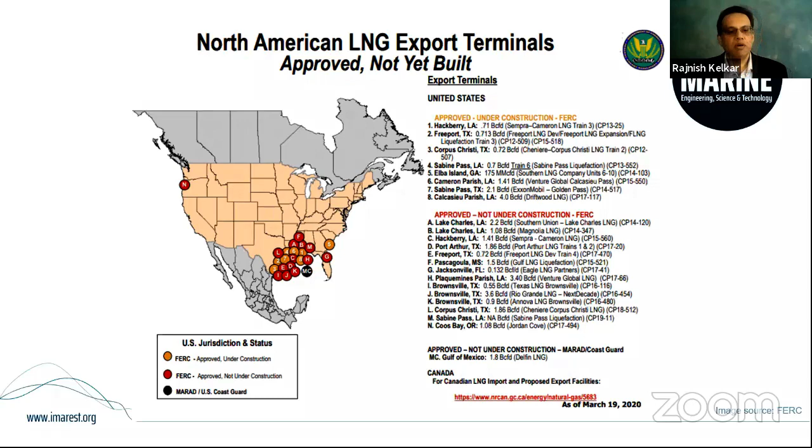So basically what this means is that site and concept selection is one of the most important factors. The select phase, right? The largest opportunity is available to reduce risk by choosing the best site and the best design possible, not only from the risk but also from the cost perspective. And choosing a site from the shipping and maritime perspective, although there are many different criteria, there are a couple of very logical things I can say, like proximity to town. It shouldn't be too close to a busy center or a town. It doesn't mean you'll always find an ideal site, but that's one of the factors.

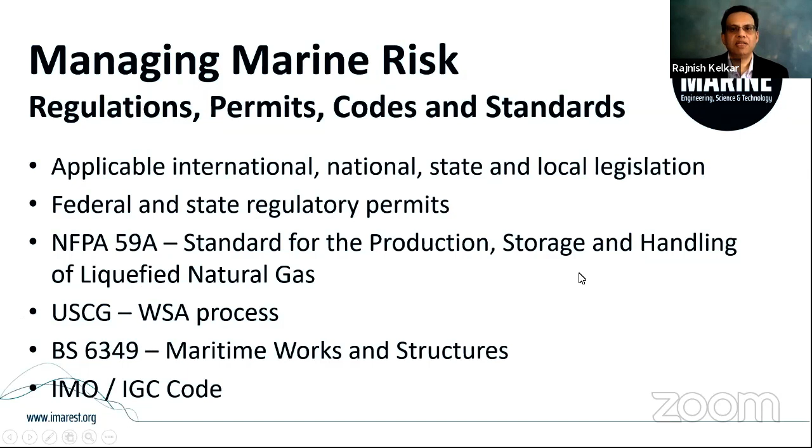And also in operations, there's the IMO and the IGC code. IMO is the International Maritime Organization, IGC is the International Gas Carrier Code. We need to meet those for vessels which are in operation. So going to the next slide.

So let's look a little bit deeper into the federal permitting process. And I've not touched the state process here because that's going to vary state by state. And also we don't have the time. But this process takes care of a lot of things that are federally regulated, so it makes sense. It's very important. So FERC and the US Coast Guard are the two main bodies in here. This is specific to the US, but you'll have similar regimes in other parts of the world as well. So let's talk a little bit about the FERC regulations.

FERC stands for Federal Energy Regulatory Commission in the US, and FERC's approval is needed to site, construct, operate, and place a facility or a terminal in the US. And it's required under Section 3 of the Natural Gas Act. So it's an independent body. They have the authority over this. Similarly, in Canada, at least on the West Coast, there's the BC Oil and Gas Commission. So they are a similar body to FERC.

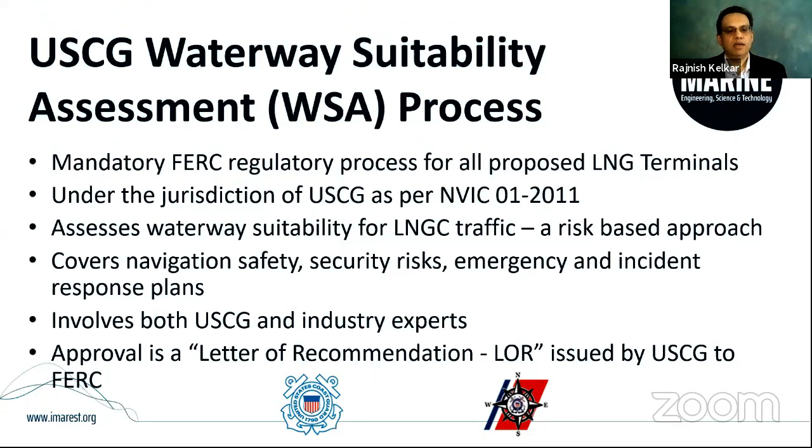So one of the main parts of the WSA is the WSA risk assessment. Now this is classified as sensitive security information, or you can classify it as protected critical infrastructure information, which prevents it from being open to public sharing and dissemination. It's shared on a need-to-know basis under a non-disclosure agreement under the Department of Homeland Security. So it's controlled information. It's all geared towards risk reduction in bringing LNG vessels in and out of the US ports, right? And includes navigational, operational, security risks in transit, including some possible intentional acts to damage the LNG carrier or facility. So it's a very important piece of work.

Output from this is that you need to ensure that you have response plans, facility security plans, and transit management plans, which need to be developed along the permitting process, but need to be in place before start of operations. In fact, even before you start construction. For example, during construction, you might need a special security plan for module transportation and things like that. So very important piece of work.

So a subset of the WSA risk assessment, I just want to talk about the security risk assessment part of it, because it connects to a few other things that we'll be talking about further down in the next few slides. This too is sensitive security information, or PCII, protected critical infrastructure information, and it evaluates security risks, right?

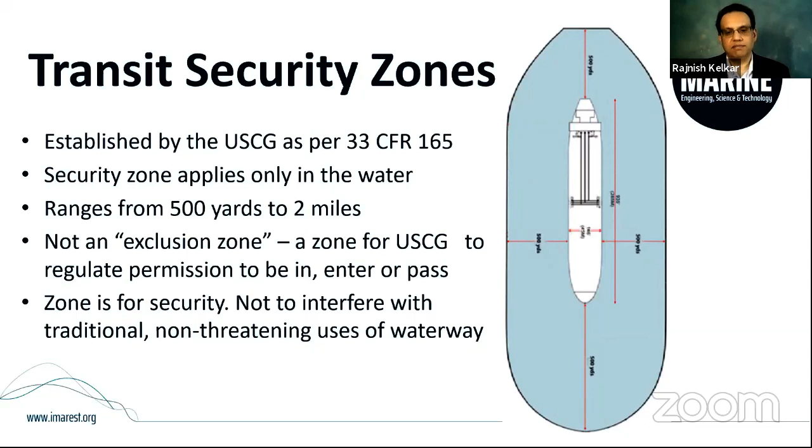So now let's look at the zones of concern. Basically, we looked at the security zones, and we said that there's a chance of a vessel possibly being attacked. There's also a chance of possible grounding. You can have vessel collisions that can happen too. Those are certain risks. They could be intentional or accidental discharge, right, of LNG. And once there's a large quantity of LNG spilled on the water, of course, there's going to be a huge gas cloud, and then there could be potentially a large pool fire.

So because of that risk, US Congress actually asked Sandia National Laboratories, which is located in Albuquerque, New Mexico, to study the impacts of these large pool fires. They did two reports. The first one was in 2004 for smaller vessels up to 150,000 cubic meters, and the 2008 report was for larger vessels up to about 265,000 cubic meters, which is the Q-Max vessels, right?

So their study actually defines 3 concentric zones of concern based on the thermal hazard from a large pool fire. And they have looked at accidental and intentional. They've looked at near shore and offshore as well. And they've given some broad guidelines. And they've said that if you want to analyze this a little bit more, then their guidance is to do computational fluid dynamics, CFD modeling, so that you can improve the analysis for very site-specific hazards and put some additional measures and mitigations in place.

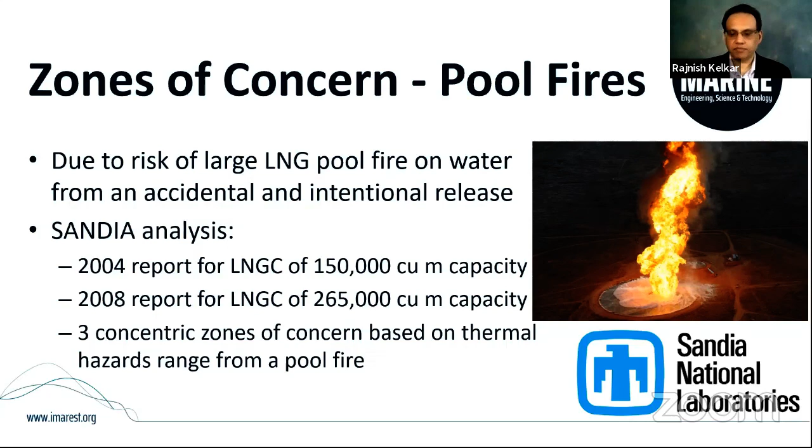Zone 2 and Zone 3 are decreasing levels of impact. In fact, in the lowest zone, I believe the thermal impacts are like 5 kilowatts per meter square, which if you shelter in place, then that is adequate. If you have some barrier, if you're not exposed directly, then you should be okay. But Zone 1 is a zone of concern, and definitely needs some mitigation measures.

And some of those strategies you can employ there are what we talked about as part of the safety and security zone assessment. Vessel security zones need to be in place. You need to manage the traffic in that area to avoid collisions. So having a VTS, vessel traffic service, is a good idea. Ensure that you have emergency response in place, capability for firefighting with tugs, and on the tugs, have ability for salvage and response.

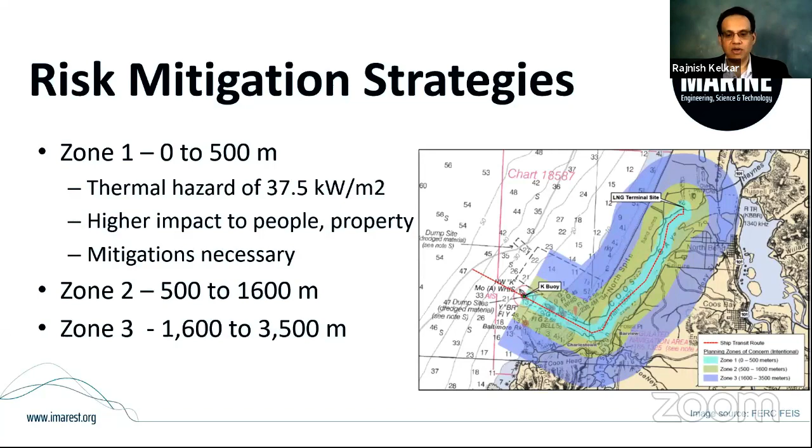We should have community warning systems and procedures, and also have educational programs for increasing community awareness of what happens in case there's a large release. And of course, gas cloud dispersion modeling studies and things like that. You can use CFD for that to understand specific hazards.

So now we already looked at the marine risks with regulations, codes, and standards. And we also looked more closely at the federal permitting process and the marine risks addressed by the Coast Guard, WSA process, Sandia zones, and things like that. Now let's look at what the industry guidance and best practice has for us. So I've just picked 3 main ones. There's SIGTTO, OCIMF, and PIANC. There are others, but I've not listed all of them in the interest of time.

SIGTTO is the Society of International Gas Tanker and Terminal Operators. Their recommendations are not mandatory, but are extremely important and relevant for risk reduction. OCIMF is Oil Companies International Marine Forum. They also publish the ISGOTT, which is the International Safety Guide for Oil Tankers and Terminals. They also publish mooring equipment guidelines. The fourth edition is the latest one, I believe. That's called MEG, mooring equipment guidelines. And PIANC stands for Permanent International Association of Navigation Congresses, but I think it's been renamed now to the International Navigation Association. So these three bodies are extremely relevant for marine risk assessment and reduction.

So let's look at SIGTTO, because SIGTTO is the most relevant and has published a lot of material on this for operations as well as for site selection and design. This paper in particular, the SIGTTO information paper number 14, is extremely critical. The central theme of this, just as it says, site selection and design, is basically selecting the appropriate site, which is what we talked about in our first slide, if you remember, the risk reduction in the early phases.

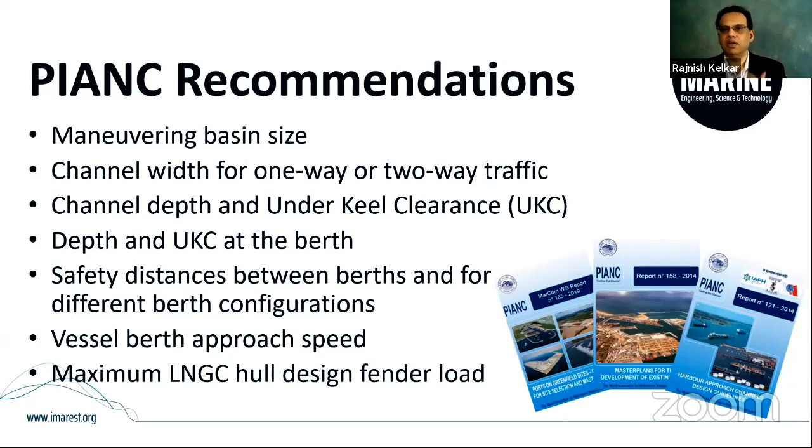Right? And then the berthing approach speed, I think they've specified 122 millimeters per second, and also the maximum hull design loading. So there are some values which they've given in the studies. Safety distances between berths for different berthing configurations and things like that. So a lot of relevant information.

So in most of the projects I've been involved with, we've done full mission ship simulators. This is actually a must. You may need to do many simulations. This is similar to simulators in the aviation industry.

The simulations that we did were at CMA, California Maritime Academy in Vallejo, California. There is also MITAGS, which is Maritime Institute of Technical and Graduate Studies in Maryland. They have the PMI, Pacific Maritime Institute. There's MSI, Maritime Simulation Institute at Newport. In Europe, there's Force Technology in Denmark. So there's quite a few you can choose from.

All the hindcast data from the current and environmental conditions is input into the model. Bathymetry information is put in. You can simulate, for example, the as-is condition of the channel, and also if you're going to dredge and expand the channel, then you can do both to see where you need to do what exactly to make the transit of the vessels in and out very efficient and safe.

You can use the one main simulator, and you can use 2 or 3 different tugs and work as a team, tugs and ships together in real time with real-time communications. And you can also test out new technology, things like differential GPS, portable pilot units, and identify where you need additional aids to navigation, buoys and other markers that may be necessary, plus train your ship's crews before they actually bring the vessel in. So a lot of good risk mitigation measures there.

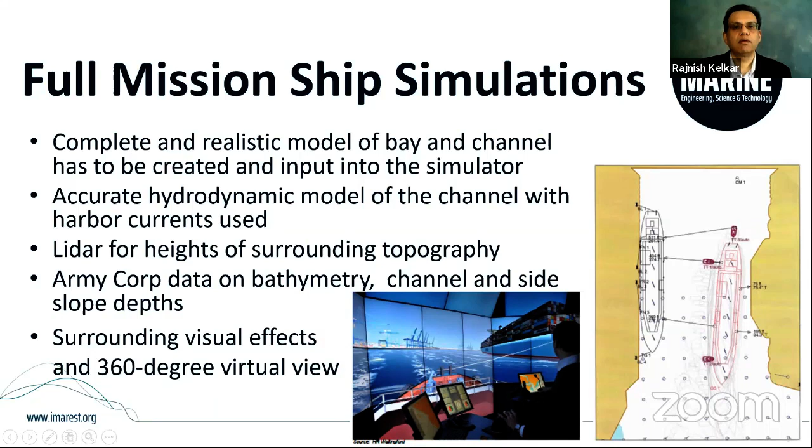So some of the simulation parameters that we used, you have to decide how many pilots will you have? So we had used 2. It depends on the length of the pilotage and things like that. Generally, for LNG vessels, you should have 2 pilots minimum, number of tractor tugs, and whether these tugs would be tethered in active escort or just passive mode, or would it be just escorting, and where would they actually tether, and so on.

You can involve your ship owner and operators also in the simulation, bring them in, let them see it. You can bring in regulators as well, so they have the comfort. They actually want to see how you're doing the simulations and what the risk is; the US Coast Guard wants to see that. You can bring in customers and other stakeholders as observers as well.

Do a lot of tests in terms of inbound, outbound, loaded and ballast passages, day and night. Also, you can simulate failures, things like engine failure, steering, mooring breakage, disabled tugs, and so on. And you can use, as I said, technology for DGPS and portable pilot units as well.

So we were on this slide here. I think I clicked to the wrong place. Okay.

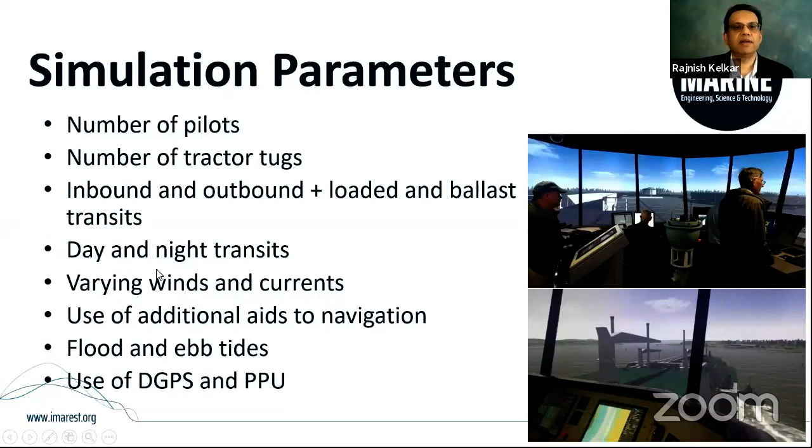So simulation will reveal a few other challenges and channel risks. For example, you might find that it's not wide enough or deep enough, or may have some sharp turns. So the selected channel may not be ideal from all perspectives, right? It may not be deep enough, wide enough, or it may be tidally restricted.

There's also an increasing trend of vessels just getting larger and larger. Ports are not becoming larger. There's a lot of cost in dredging. So the impact is that you may find that you are unable to bring in ships, or the margins of safety are reducing, that there are delays and things like that.

So there are a lot of advantages. You can overcome all of these issues by dredging and widening and improve safety. But there are a lot of operational challenges to dredging as well. Something I just wanted to touch upon on this slide; I just have one slide on dredging. So the operational challenges could be like mobilizing and demobilizing. There's a time and cost to that, right?

There's also an issue with in-water work windows. You cannot dredge throughout the year in some areas. Maybe some places it's possible, but for example, on the West Coast, it's October to February. There's an impact to the benthic species and fish habitats. In some areas, for example on the West Coast, there's the eelgrass, which is a salmon habitat sensitive area. So you need to think about that and get appropriate permits. In the US, it's the Army Corps of Engineers that you need to work with pretty closely.

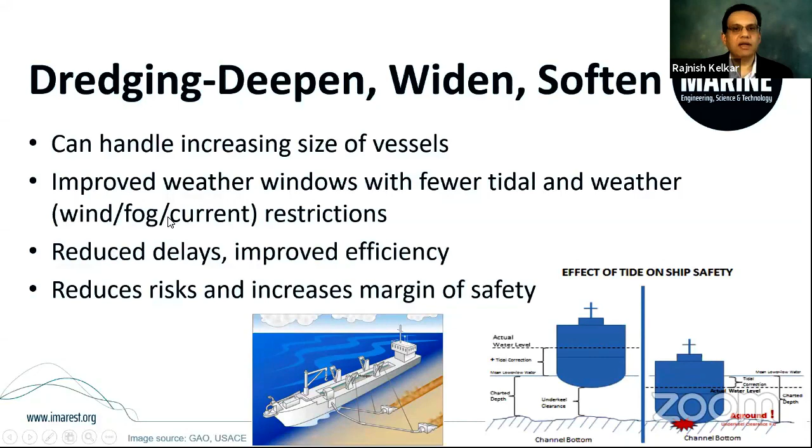Right? So now we just looked at marine risks with industry guidance and best practices. Now let's look at managing marine risks with company standards and policies. When I say company standards and philosophies, there's quite a few of them. I've just listed here the marine philosophy. There are many others, and I will not go into those. They capture all the requirements which are over and above codes and standards, and they are input into the pre-FEED, FEED, and detailed design.

They capture the essence of your design concept and feed into the basis of design, detailed engineering, and design of the facility. And the marine philosophy is used through all the phases. It starts from identification of the opportunity, all the way up to the construction and operation of the facility. So it's a very important document for project development.

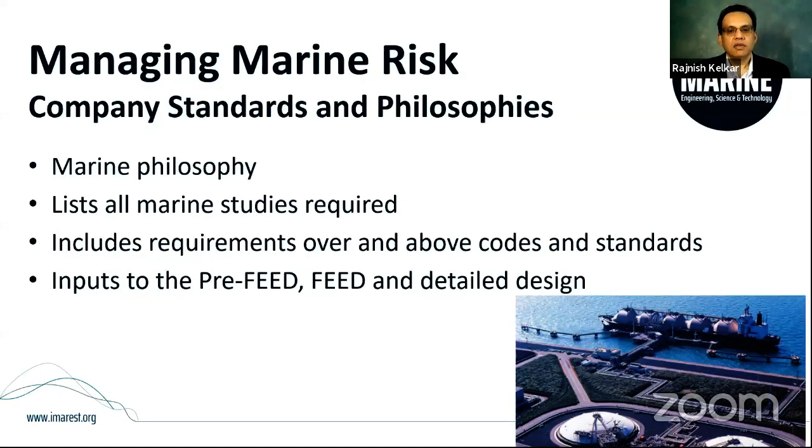So let's look at some of the studies that are required as part of the marine philosophy. Again, this is not an all-inclusive list; I've just included a few. There's the navigation feasibility study, which checks to ensure that the vessel can come in and out safely. Storage and logistics study, which looks at the storage availability in your tanks, minimum capacity of the tanks, whether you have tank tops, whether you will have a liquefaction output that can be sustained, and the number of ships that are coming in and leaving.

It's actually a Monte Carlo simulation, which looks at all the variations and limiting factors and delays due to metocean conditions, weather conditions, tank sizes, operational limits, and other outages. You can put in all the old met information and run the simulation. It tells you what size the fleet should be, and there's all kinds of other studies that need to be done. In the interest of time, I'll skip speaking about those, and we'll go to the next slide.

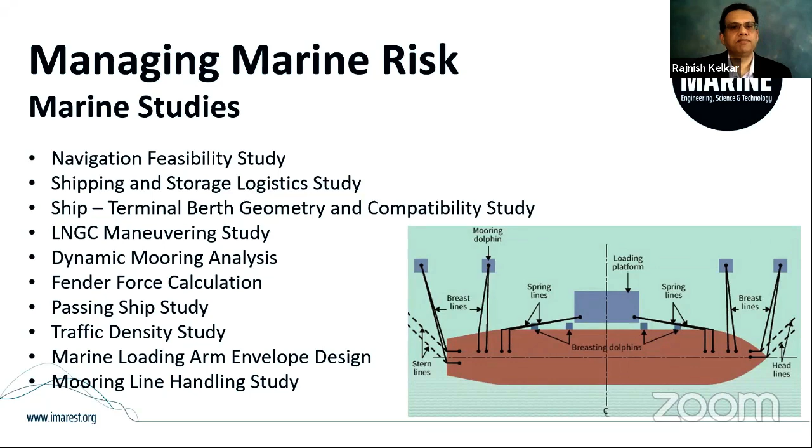So let's talk a little bit about other opportunities that are there in the project development phases for the project to add to reduce risk. And there are two optional features, actually. Not all terminals may have them. So that's the PERC and the quick connect and disconnect thing.

Marine loading arms, basically, can be equipped with this PERC release system, and the connection to the vessel could be a QC-DC coupling. So the marine loading arms are required for loading and discharge of cargo, critical ship-shore interface equipment. It's important because that's the place where the containment is actually broken twice in every ship's visit, first during connection and then during the disconnection.

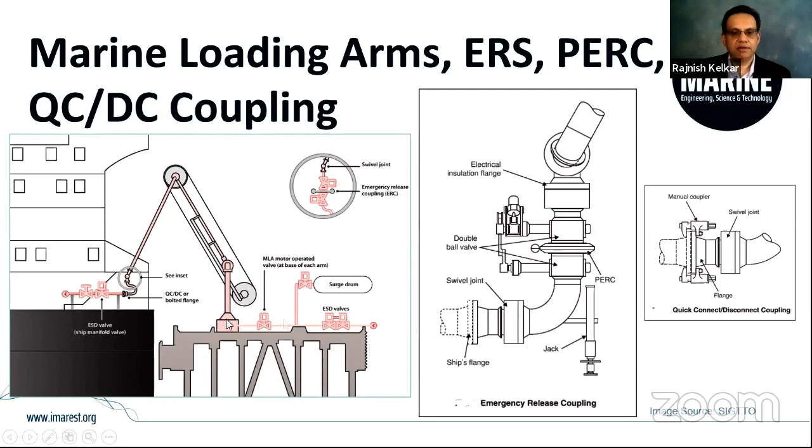In most instances, it could be just a basic flange connection. It can be upgraded to a quick connect disconnect, which makes it easy to connect. Because when a vessel is in motion and there's a lot of heave and surge, you don't want to be there trying to take bolts out or put them in. It's just dangerous. The coupling has a hydraulic operation, and that hydraulic operation is independent, so you can release it pretty easily. It's a risk reduction measure for safety of personnel, but I think it's extremely important and should be part of the design.

So we talked about the ESD. Now the ESD is actually activated simultaneously ashore as well as on the ship through a ship-shore communication link. It's called the SSL. So it prevents any delays, communication lapses, things like that, which can be issues resulting in an incident, and that must be avoided.

So it basically interlinks ship to shore. It's a fiber optic cable. Pneumatic is used as a backup. If it's fiber optic, then you can transmit not just ESD signals, but also voice, data and other.

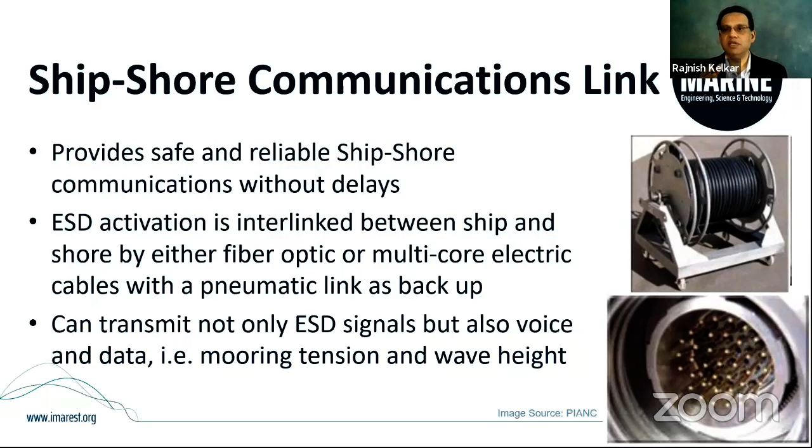Now, mooring and berthing is another very critical operation, and it definitely must not be underestimated. There have been lots of incidents due to errors, which can result in berth, fender or hull damage.

So that's basically a distance speed approach indicator. It uses laser to tell the master and the pilot real-time information on where the position of the vessel is relative to the berth and the approach speed. It can have alarms and things like that. Usually displayed on the berth, but the pilot can have a portable unit as well, if that's possible.

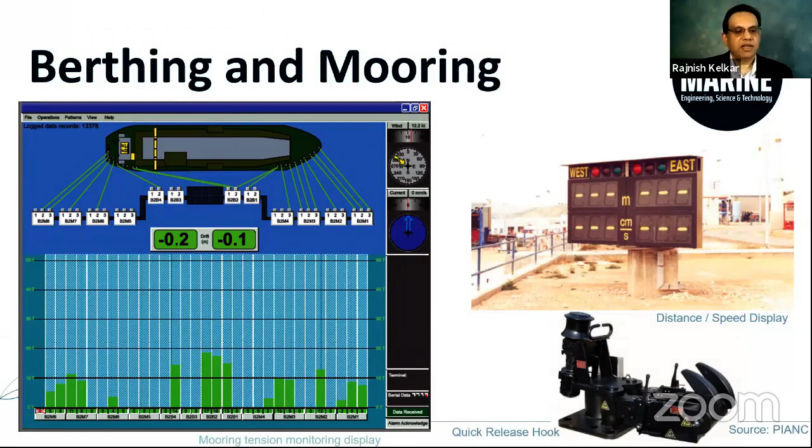So the other things you can do in design are basically install some kind of a real-time system like the NOAA PORTS system. NOAA is the National Oceanic and Atmospheric Administration in the US. PORTS is Physical Oceanographic Real-Time System. So this system measures, collects, disseminates, and predicts accurate real-time data, and it's for the US only.

In Canada, they probably have other systems for doing that. In other parts of the world, there might be as well. If not, then it's a good thing to implement, to improve safety and efficiency of maritime transport and commerce. In the US now, I think about 60 out of 175 large ports have this. So there's still scope for expanding that even in the US. It's usually a public-private partnership with NOAA to design, install, and maintain.

You can have sensors like the acoustic Doppler current sensor, tide measuring sensor, met data collection, wave monitoring. Some of these may have to be installed on the Scripps oceanographic buoys and not Coast Guard buoys, but some of them could be installed on Coast Guard buoys.

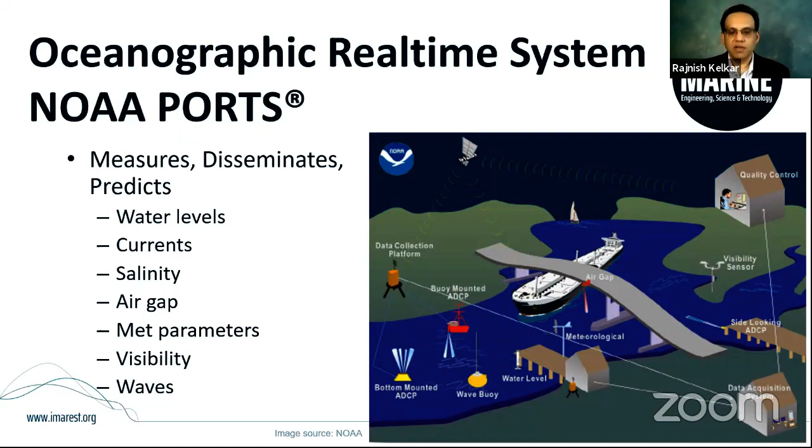So if you can increase cargo carrying capacity draft by even 1 inch or a centimeter, that could mean a lot of extra cargo that can be lifted. Also useful for local emergency response and oil spill response monitoring people. So lots of advantages in the NOAA system.

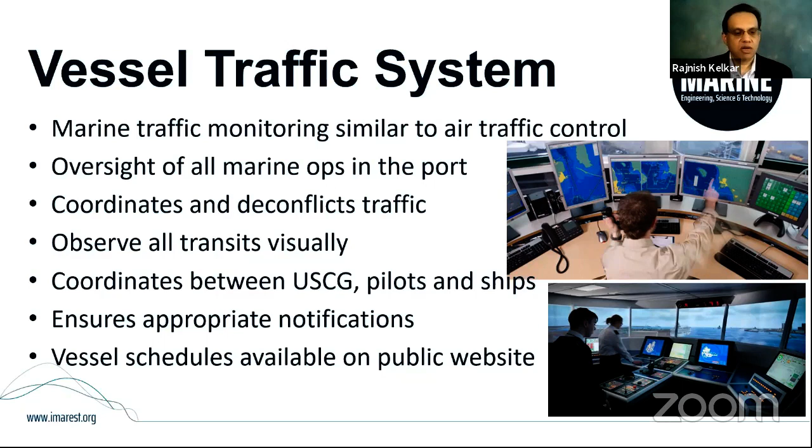Vessel traffic information system is basically similar to air traffic control. One individual has oversight of all the activities in the bay and can track that, and can deconflict the issue before you realize on the ship that you may be in conflict with another vessel and a collision situation may be occurring. So there's a benefit to this, not just to the project, but to other vessels in the area and also to the other stakeholders and users of the bay. So that has to be emphasized. It's a good thing to install and something that you should.

So some of the other measures that you can put in place, basically operational measures, would be having some sort of a safety management system. This is once you get into the actual operational phase. You need to develop this at the start and then build it along the way. MTMSA stands for Marine Terminal Management Self-Assessment, OCIMF's method of assessing yourself. And then, of course, following that up with external audits.

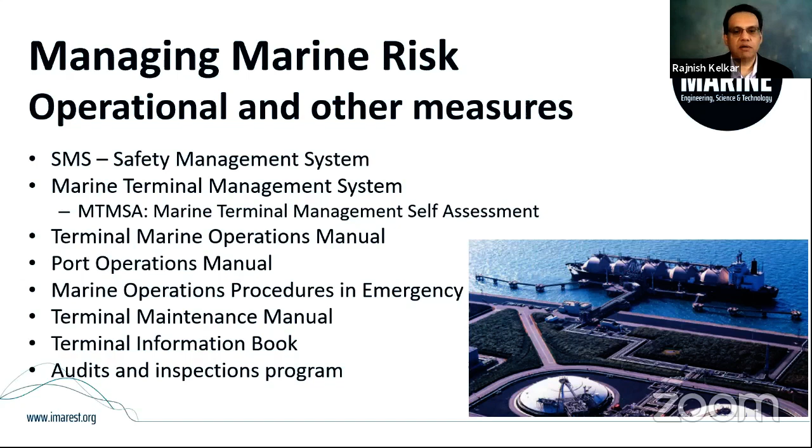You will need to develop a Terminal Marine Ops Manual, Port Ops Manual, operational procedures and emergency maintenance manuals and things like that. So all of these things need to be developed as the project progresses. And one of the most important things that you can do is ensure that you increase local engagement and content. For example, you can use local boats and mariners as contractors for other services during construction activity.

You'll need the tug contract. Maybe those people can man the tugs, operate the tugs, and other marine services as well. So there's lots of opportunities to engage, and I think these are all good things to help bring the risk down. Pilots organization, you need to be committed to develop it, training and hiring of people, working with the port authority, simulator training in advance so that all are prepared, participate in the Area Maritime Security Committee and Harbor Safety Committee, and of course, local spill response with drills and exercises.

And that's basically your emergency plans: transit management plan, which covers vessels coming in and out, facility emergency response plan, and the ship emergency response plan for during transit. So these are absolutely essential, have to be developed during the permitting phase, but then move over into the operational phase later.

So we are at the end of our presentation. I'd just like to summarize here to say that we reviewed the various aspects of the development of marine LNG terminals in new or existing ports. We also saw that the greatest opportunity is in the early phases. And we looked at the process and reviewed the following means to reduce risk: meeting regulations and doing a very well-defined and robust permitting process, following all the relevant industry best practices and guidelines, implementing company requirements, philosophies, and so on, and adding risk reduction further into operations.